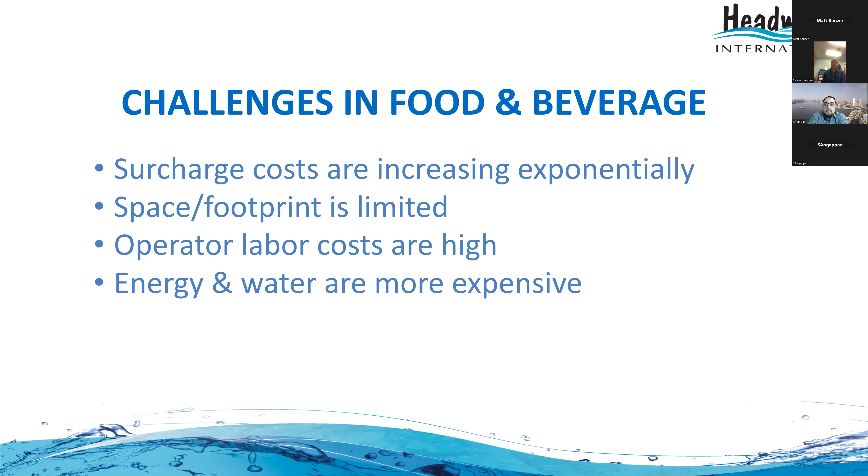Food and beverage industry is very diverse. There will be plants like a brewery, or it can be a soft drink, it can be meat. So the BOD, COD, all those things are highly variable. It can be as low as 1,000 milligrams per liter, or it can be more than 10,000, 20,000.

In a distillery, for example, the BOD can be up to 20,000, whereas in a small food packaging plant, it can be 1,000 milligrams per liter. Typically, for discharging to a local treatment plant, your limit will be 250 BOD and TSS, whereas discharging to surface water, it can be as low as 10 milligrams per liter.

And the FOG in the wastewater can be highly variable as well. In a meat plant, you will have high FOG, fat, oil, and grease, or it can be non-existent in a soft drink plant. Similarly, TKN ammonia can be very high, 300, 400 milligrams per liter in a meat plant, whereas in a soft drink plant, it will be non-existent.

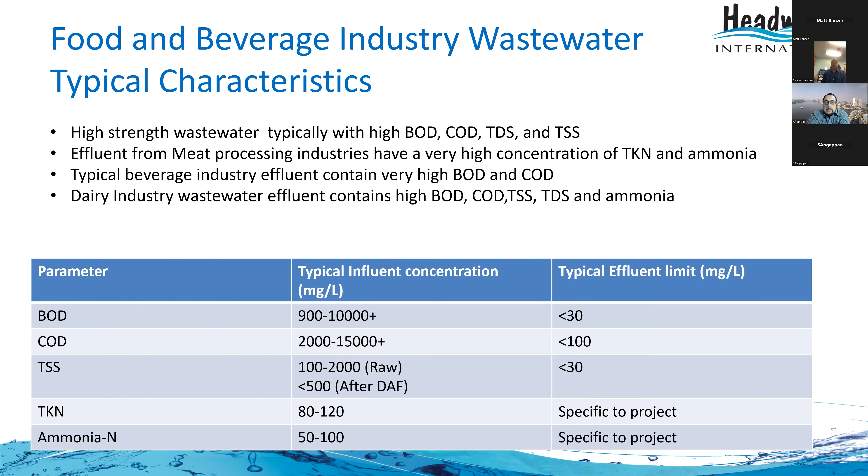So we can go through some case studies to show our installations in food and beverage industry. Surcharges are the number one challenge faced by the food and beverage industry. Typical limit to discharge to your municipal plant is 250 BOD and TSS, ammonia less than 45. These are typical municipal wastewater limits.

So municipal plants don't want to deal with any wastewater stronger than municipal wastewater, so they make you treat this wastewater up to this level. The surcharges are quite variable in the US. It can be as low as $1 for 1,000 gallons, or as high as $2 for 1,000 gallons. This is very diverse in different locations.

In California and Texas, water is scarce, so they charge a lot more, whereas in southeastern states, it can be low. Similarly, California BOD surcharges can be very high, whereas in the southern states, it can be very low. You can see the typical limits here - these are the middle range. There are many states under this dollar surcharge or over these surcharges; this is just the middle part of the surcharge limits.

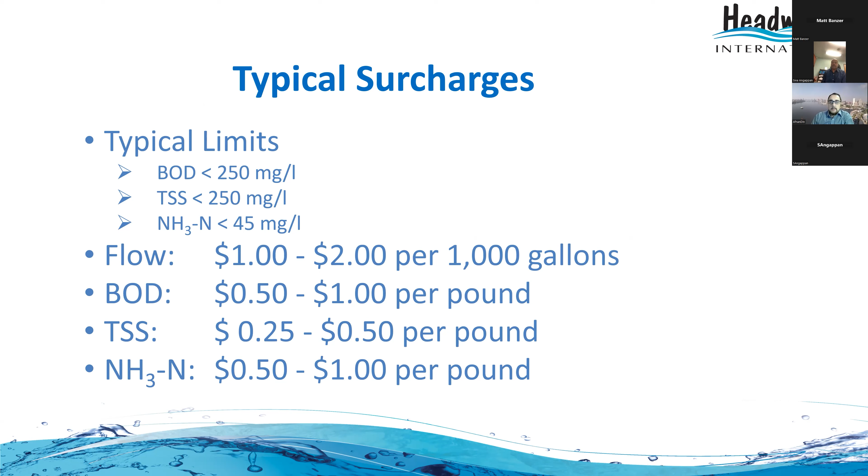So when you are looking at a typical mid-size food and beverage plant, we took a case study of 250,000 gallons per day discharge based on the lowest surcharges, with BOD at 1,000 pounds per day, which is about 450 kilograms per day, plus TSS and ammonia loads, to see how much surcharges would be charged. A typical plant this size would pay $1,000 per day, or $365,000 per year. As you can see, this is a very large amount.

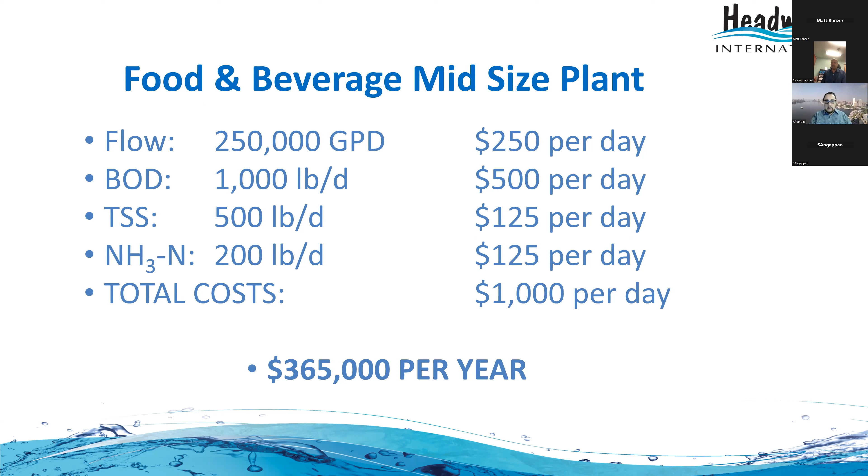We have installed some MBBR plants in food and beverage plants where the payback period from surcharge savings is as low as 1 to 2 years. That means if you spend $500,000, you can recover that through surcharge savings within a year and a half, so there's a short or immediate payback by installing a treatment system to avoid the surcharges.

So the operating cost is another challenge. Labor cost used to be $20-25 per hour just a few years ago; now it's almost $50 per hour for technical labor. The MBBR, as we propose, requires minimal operator attention, and I'll explain this in case studies later on. Meanwhile, energy costs have also increased by up to 50%.

So in those kinds of situations, you may want to consider anaerobic technology, anaerobic MBBR. Our version is called EnergyCell. Our anaerobic technology can not only save energy costs up to 80%, but it will also generate energy in terms of biogas that can be used for heating. So it can be net neutral or even positive in terms of energy consumption.

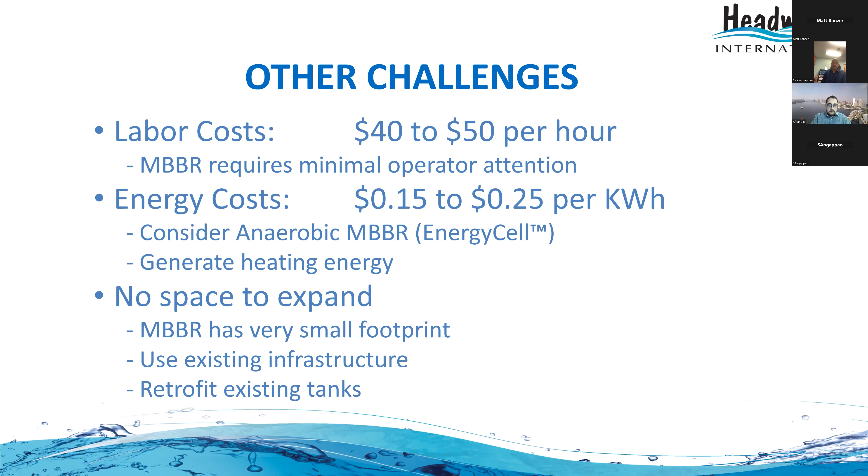And if we don't have any space to expand, we can offer multiple solutions. We can build a small MBBR plant in a small location, or we can expand using the existing infrastructure, such as tanks and other equipment on site. So with minimal space to expand, we can increase treatment capacity in terms of flow or to meet new requirements or increased loads.

So MBBR basics, I'm going to briefly touch on this. Typical biological treatment systems can be divided into two broad groups: suspended growth, such as activated sludge, or attached growth, such as fixed film systems. Within suspended growth, you have MBRs, SBRs, and other technologies. SBR is a batch technology, whereas conventional activated sludge is a continuous flow technology.

In attached growth, it can be a rotating biological contactor, or RBC, or a trickling filter. A trickling filter is a static fixed film, so the media itself does not move, whereas a dynamic fixed film, like an RBC, has media that is moving around. MBBR is a variation of the dynamic fixed film technology.

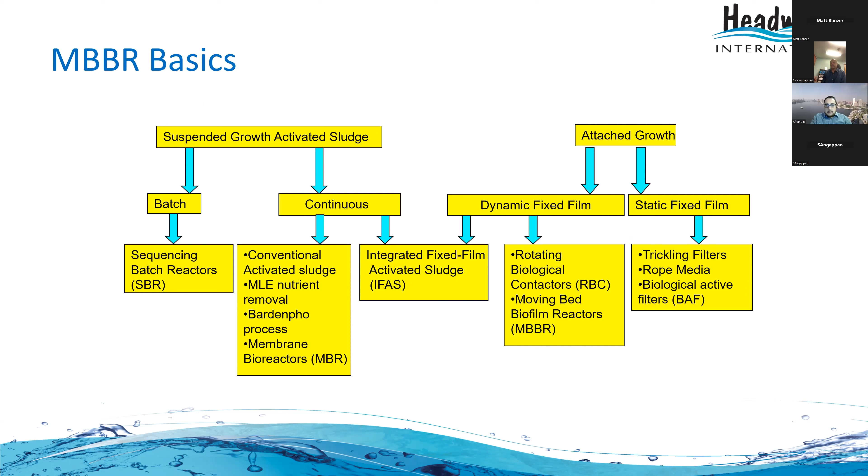In an RBC, the media is contained in a large drum, and the drum itself rotates, which is prone to failure in terms of bearings and other things. Whereas in an MBBR, small pieces of media float and are mixed in a tank, with no moving mechanical parts. So everything inside the MBBR is basically maintenance-free for over 30 years—there's no failure or anything like that in an MBBR process.

There's a newer version of MBBR technology called IFAS. The only difference in IFAS compared to MBBR is that we recycle the sludge. This is advantageous when you have an existing activated sludge system and want to expand capacity in terms of flow and loading—we can use IFAS technology to do that. By recycling the sludge, you bring in the activated sludge, and you also have media in the tanks, making it a combination of fixed film and suspended growth technologies.

The footprint of this technology is even smaller than MBBR because you have two different processes running within the same tank. The only difference is that in MBBR, we tend to use DAFs, which have a small footprint, while IFAS technology will try to use the existing clarifiers.

So why would you choose one versus the other? You'll choose MBBR if you have a greenfield site and don't want any kind of operator attention within the biological reactor—many of our MBBR plants don't have a dedicated operator; production plant personnel check things once a shift and go back to production. That's a big advantage with high labor costs, especially for small wastewater plants. With IFAS technology, you'll probably need a dedicated operator monitoring MLSS and RAS. It's suitable for larger plants or for retrofitting an existing plant.

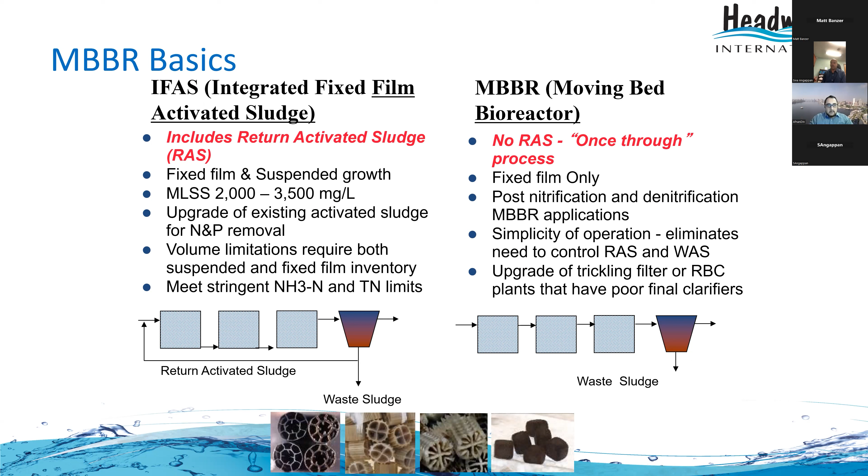We can use IFAS technology for biological phosphorus removal and total nitrogen removal, whereas MBBR is generally used for BOD-only removal processes. If we have a large meat plant, for example, we can use the IFAS plant to remove total nitrogen as well as phosphorus. So biological nutrient removal can be done with the IFAS process, a combination of fixed film and suspended growth processes. MBBR is more generally used for industrial pre-treatment, to meet pre-treatment standards to discharge to a municipal plant. It can also be used to retrofit or replace lagoons, trickling filters, RBCs, those kind of things. There are some case studies we'll talk about later on.

So the advantages of MBBR, I want to summarize. It's a single pass technology, meaning there is no recycle or MLSS to maintain. Water goes in, water comes out. The biomass is retained on the media.

It has a compact footprint, only 1/4 of the space required for activated sludge. So if you have an activated sludge plant already, we can actually expand the capacity 3 to 4 times in flow or loading using the existing tanks. We don't have to build a new tank. That's a big advantage if you have a plant you want to expand and have no new space - we can retrofit the MBBR process into that plant.

The second point is that HRT, hydraulic retention time, is not a limitation for MBBR technology. The reason is our design is based on surface area loading rate, the amount of media in the tank, not based on retention time. So you can have a very small tank with a lot of media, and that flow can handle as much as 4 times what activated sludge can handle.

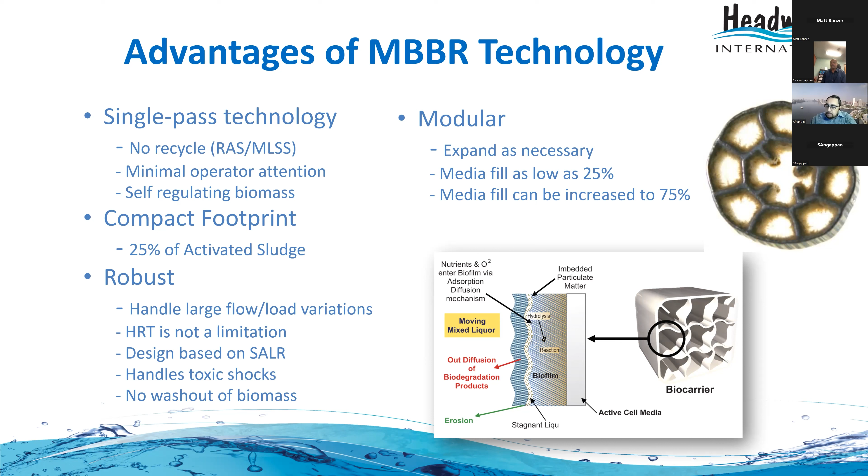That concludes the part of the MBBR basics. The next part will be the anaerobic MBBR. Dr. Somnath Basu will take over here.

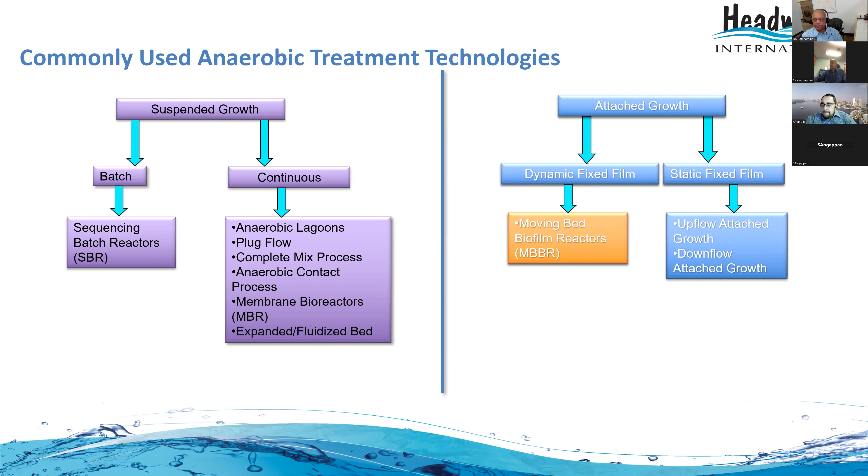Hello, good morning, everyone. I'll be very brief. So in anaerobic treatment, there are again two types of commonly used treatment processes, and accordingly there are different types of reactors, and anaerobic MBBR falls under the category of moving bed biofilm reactors. Here the movement is conducted by mechanical mixing, because the reactions take place under anaerobic conditions without aeration. This slide shows the biochemical reaction steps - there are 4 basic steps: hydrolysis, acidogenesis, acetogenesis, and methanogenesis, conducted in series by different types of anaerobic microorganisms.

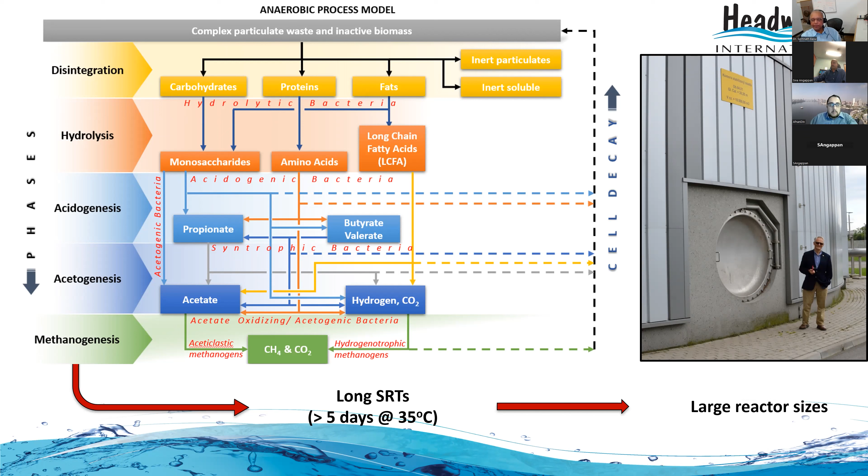So the process was developed first in the laboratory of University of Manitoba, and then it was scaled up to a pilot scale, and then at a brewery in Manitoba. So now the process is well established, and the first commercial installation has been in 2023.

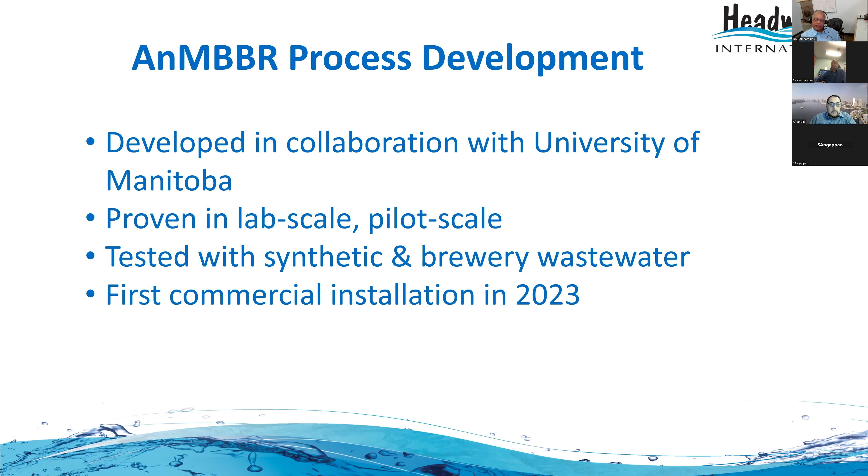Headworks also has a patent on this technology, and I'll go through some basics. Basically, the mature biofilm was developed within 2 months, as opposed to a longer startup process with suspended growth anaerobic processes, and 80 to 90% COD removal was achieved. Then the OLR, organic loading rate, we achieved about 23 kgs per cubic meter per day and 37 liters per day of biogas production.

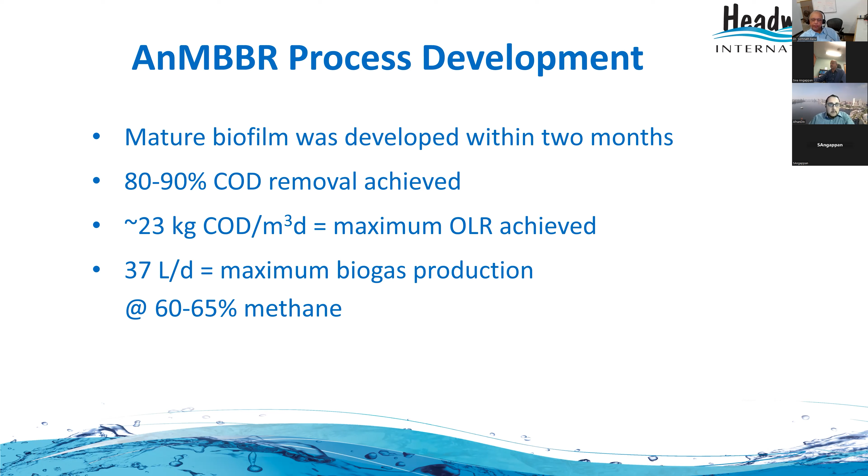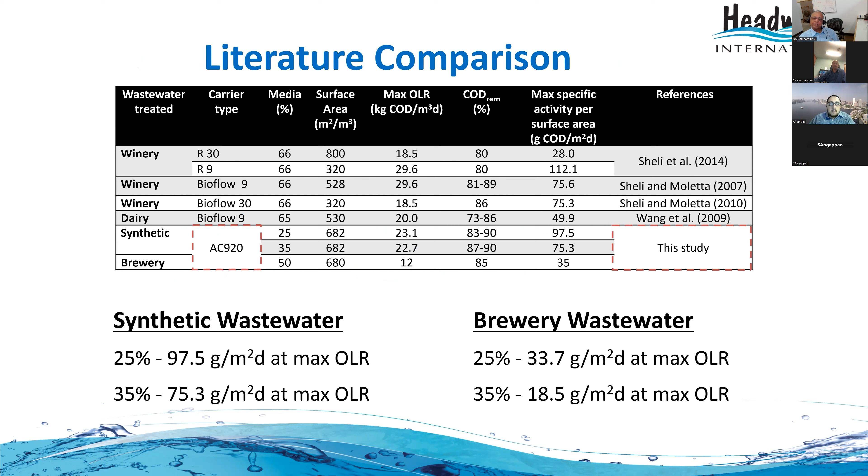I think I will skip this slide. This has some comparison of our pilot scale data versus whatever has been reported in the literature, and they are very comparable. In certain cases, they exceed what has been reported in the literature.

So in essence, what is an anaerobic MBBR? It is an anaerobic process combined with MBBR technology, so basically it derives the benefits of both biofilm processes, fixed film processes, and anaerobic processes, and it is applicable for high strength liquid waste, typically greater than 3,000 milligrams per liter. Then the biomass grows on the media support as biofilm, and because there is no aeration,

mixing is provided by mechanical mixers. The pH has to be monitored, because if there is not sufficient alkalinity, it consumes alkalinity. Anaerobic reactions consume alkalinity, so there may be a trend to reduce the pH, and that has to be monitored, and if necessary, pH has to be added, alkalinity has to be added to maintain the pH in the optimum range. And nutrients, for the most part, may not be needed for food and beverage waste, because it comes

with the wastewater. It is derived from the actual food, but if needed, there may be addition of phosphorus and nitrogen as needed. And then these reactions take place under anaerobic mesophilic condition, 30 to 35 C, and it may need downstream polishing. It depends upon the regulatory requirements of the downstream processes.

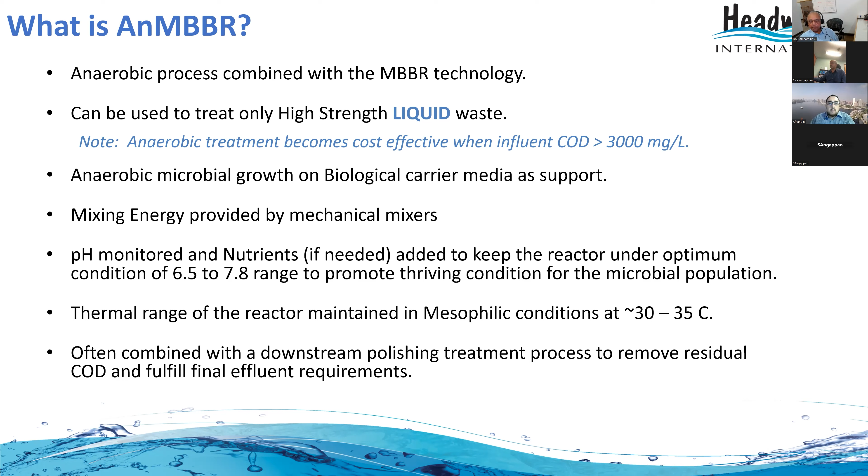So basically, as I said, it combines the advantages of both anaerobic processes and MBBR technology. The advantage of anaerobic process is elimination of aeration energy, which is about 50% of operating cost in a treatment system. And then, because the sludge growth is very low, order of magnitude less than aerobic processes, the sludge storage and hauling cost is minimized, which is about 20 to 30% of the operating cost of any treatment system.

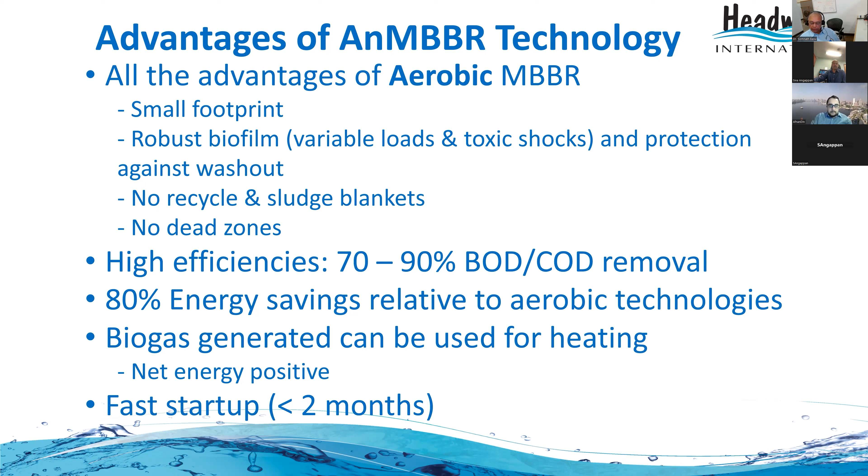And then biogas production as a fuel, which can be utilized for boiler or other purposes. And the benefits of the attached growth processes: low SRT, low reactor volume, low feed footprint, and hence less capital cost. And then because it is fixed film, it is protected from washout under shock loads and shock flows. So that is the summary.

And then this is a typical MBBR reactor. You can see the gas and then the treatment system, the treatment reactor with mechanical mixers, and then the dosing systems.

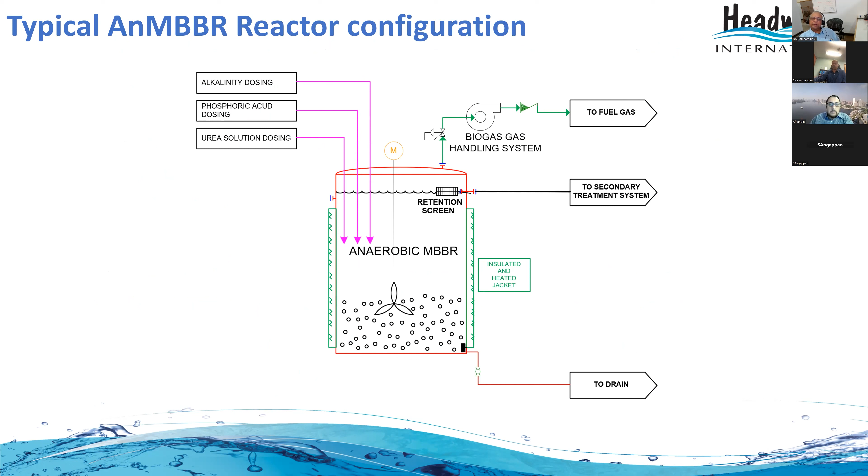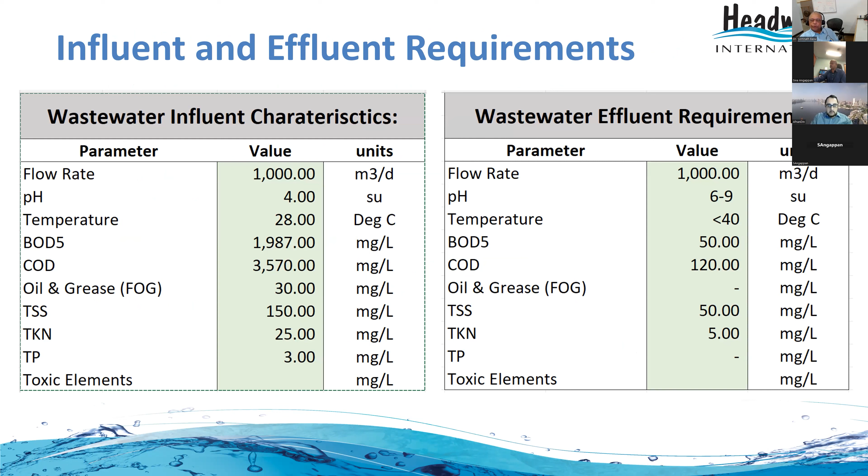Okay, then we move on to the case study, and it is a case study for the first plant that we supplied to do a project, a beverage project in Mexico. I'm not going to go through all the details of the design, but the effluent residual COD is 536, and residual BOD is 179. This is because about 80 to 90% of the COD is reduced and the remaining part has to be aerobically treated.

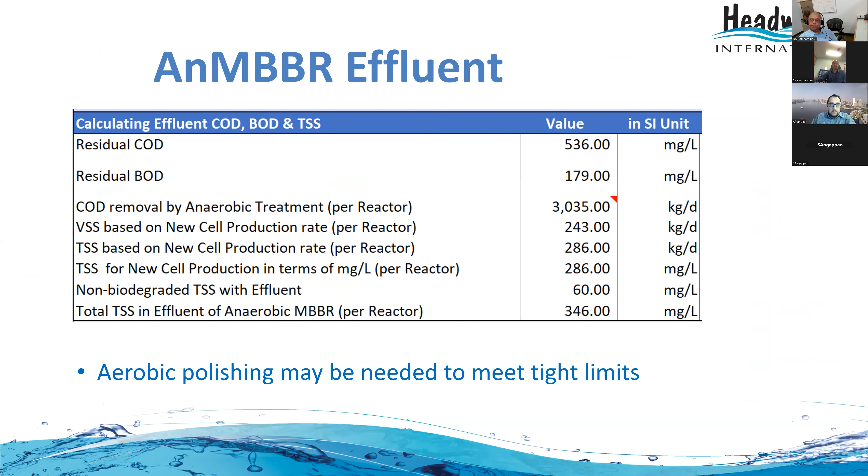Okay, then we move on to some of the case studies, and I pass it on to Mr. Din, who is the Vice President of our Middle East region. Mr. Din, please. Thank you, Dr. Som. So the first few case studies actually will be spoken about by Siva, and then I'll cover the case studies in my region. So Siva, just go ahead. Thank you, Afnan. So the first four case studies are in North America, so I will be talking about that.

So Hershey's Creamery is an ice cream plant in Harrisburg, Pennsylvania. They had a situation where they were building a greenfield ice cream plant. But they said initial 1 or 2 years, they'll be running the plant at only 1 shift per day.

Later on, they will build out to 3 shifts per day, depending on demand and production capacities. So for that, they needed a flexible treatment system that can be expanded in a modular way. We proposed a 2-tank system with low media fill.

We will design the overall system for the future capacity at 15 GPM at very high loads. But initially, we will design for 10 GPM at low loads and build it over time.

So the BOD and COD are very high. They had a preference to aerobic MBBR technology because they didn't want any kind of operator attention to the plant on a sustained regular basis. They wanted somebody to go check the wastewater plant once per day. So due to these constraints, and also since it's a greenfield site, we proposed aerobic MBBR

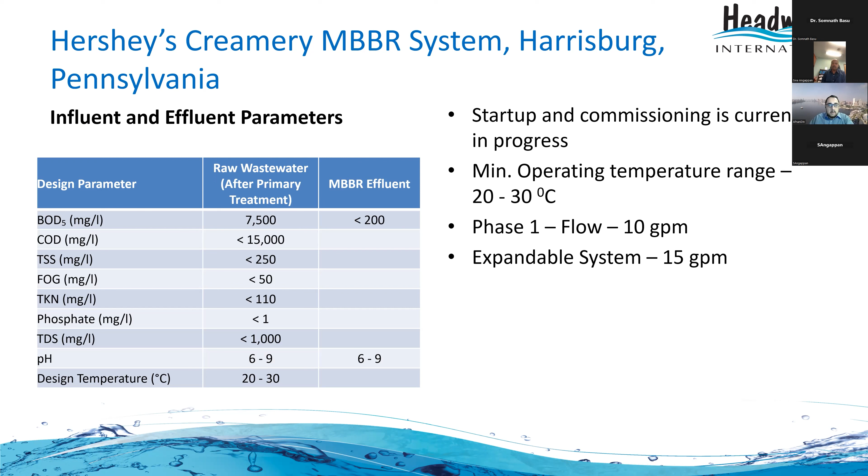This plant has already started up. It's running right now only 1 shift per day. When they are ready to expand, they will add more media without building any new tanks, so it will be a modular system.

This is a poultry plant in North Carolina for House of Raeford. They had an existing activated sludge system, but around 2018, their chicken demand doubled over the year. But they did not have space to build a new activated sludge system, so they came to us for some ideas.

So we proposed what's called a roughing reactor, which is placed up front, shown in that picture. The plant itself is very high flow, 1.5 MGD, and they didn't have to convert it to add a new activated sludge system. They would have required a 200 by 200 feet large plot to add the activated sludge system.

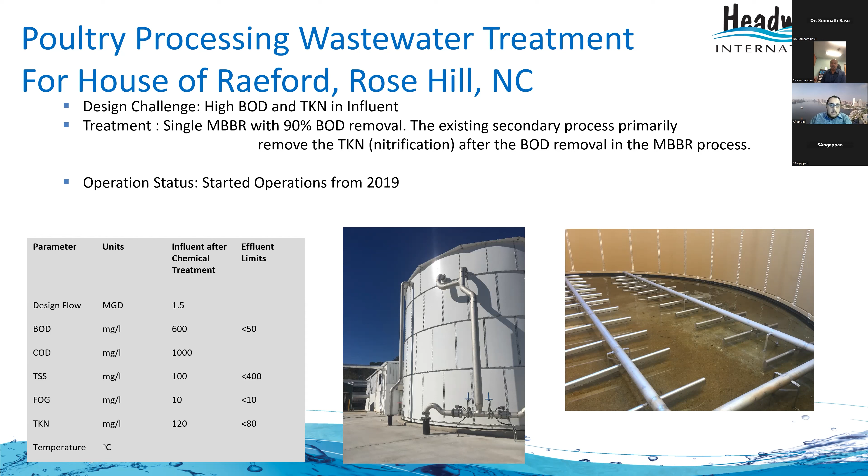What we proposed was a roughing reactor in front of the activated sludge system, shown in the picture there. That's about 40 feet diameter. Within that 40 feet diameter, we are able to remove about 90% of the BOD. So the activated sludge system following the roughing reactor MBBR can handle the remaining BOD as well as nitrogen removal, ammonia removal.

This is a potato chip plant for Frito-Lay in Peru. They also make corn chips here. They had an existing trickling filter which was failing, but they did not have any space to put in a new system to replace it, because they wanted to use the trickling filter area for other production storage.

So we put in a very compact 8 feet by 30 feet long MBBR plant, shown in the picture - basically on a walkway in the plant area. That's all the space they had available. We put in this very compact MBBR plant handling 400,000 gallons per day of flow and removing 70% of the BOD, from 1,000 down to around 300 milligrams per liter.

This is again a roughing reactor. The effluent from this plant is discharged to activated sludge and then discharged to the city plant.

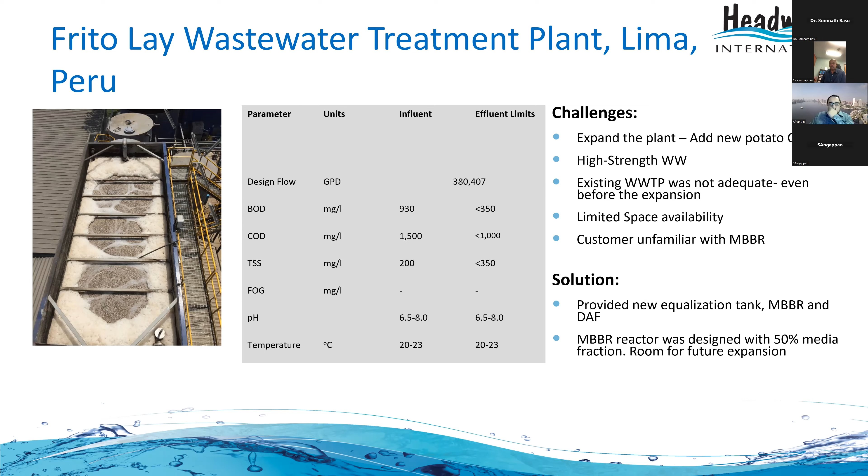This is a fishery packaging plant. They take fish from another plant, cut it into pieces and process it to make frozen fish products in Danvers, Massachusetts. They had an existing trickling filter plant, which was very smelly and a nuisance for the neighbors, so they needed a new technology to replace the trickling filters.

So we put in a complete turnkey type system. We provided the DAFs - pre-DAF and post-DAF - as well as a 2-stage MBBR reactor to replace the trickling filter. It handles 70,000 gallons per day, BOD of 1,500 milligrams per liter, and is discharged to the sewer without paying any surcharges.

By doing the MBBR technology, they have avoided surcharges as well as handled municipal complaints about smell, noise, and other issues. Those are the 4 case studies in North America.

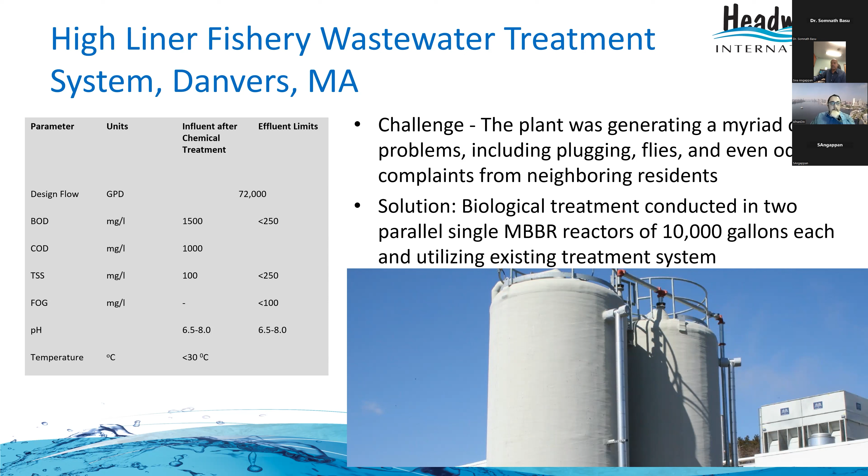Afnan will talk about the next case slides. Excellent, thank you Siva. So I'll be going through some case studies from different wastewater in the food and beverage industry. The first one is the Tanmiah Poultry Plant, a poultry plant in Saudi Arabia where we supplied a complete turnkey solution.

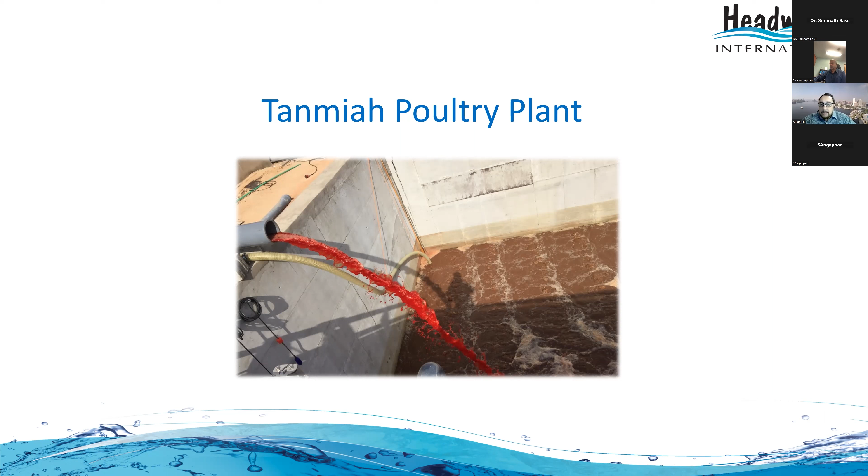It was an existing activated sludge plant where the flows and loads had increased because they had increased the slaughtering of chickens, so they had more load to treat. We offered a retrofit solution of the existing activated sludge plant where we increased capacity and improved effluent quality so they could reuse it for irrigation purposes.

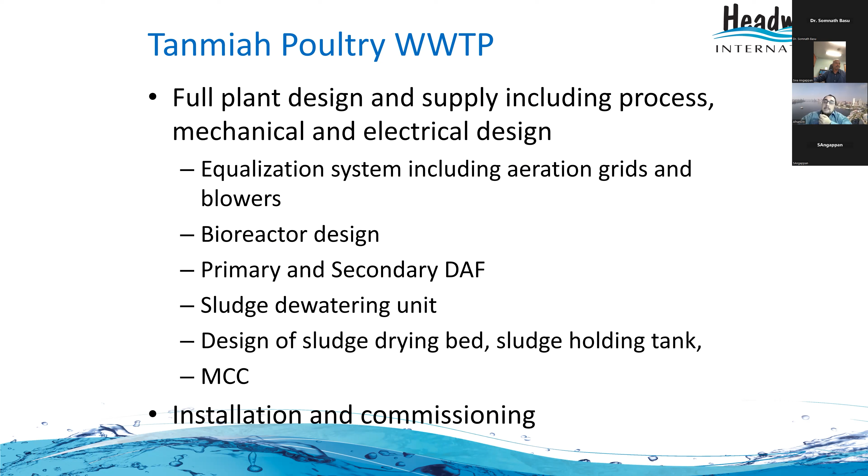Our scope in terms of what we supplied: we did the complete plant design, and supplied all the electrical and mechanical equipment. This includes equalization tanks, aeration grids, blowers, the design of the activated sludge plant coupled with the retrofit MBBR solution, both primary and secondary DAFs, as well as sludge dewatering. We did the installation and commissioning. The only thing Headworks did not do here was the civil works - apart from that, we provided everything.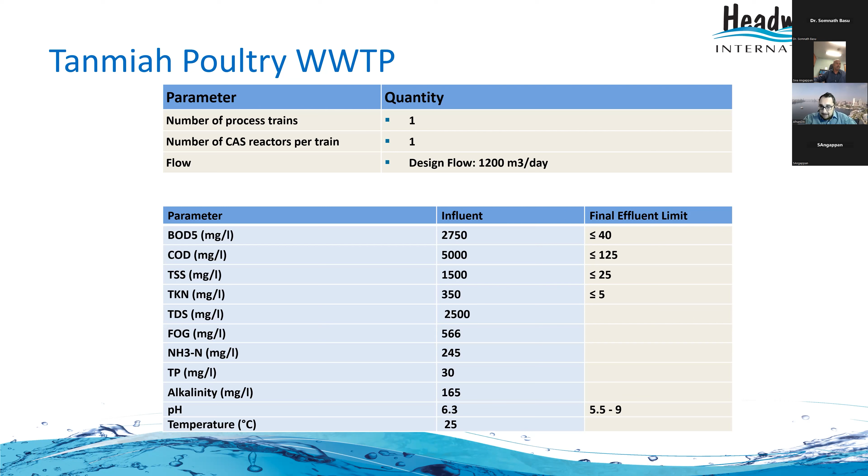The system was designed for 1,200 cubic meters per day. Typically in poultry effluent treatment you have high TKN - you can see here we had very high TKN, 350 milligrams per liter, and we had to achieve an effluent of less than 5 milligrams per liter. COD is high, around 5,000, but it's highly biodegradable waste. BOD was around 2,750, and we had to achieve less than 40 BOD in the outlet and less than 125 milligrams per liter COD in the outlet.

Here you see the proposed scheme and the scheme that we followed. After the influent, there was a pre-treatment screenings system we supplied, followed by equalization. After equalization, we have primary treatment through a primary DAF, where we dose polymers to primarily remove solids and associated BOD. Then we had an existing activated sludge tank which we retrofitted with an MBBR roughing reactor to handle the additional loads coming in, and we kept the existing activated sludge plant as an activated sludge reactor using the existing surface aerators.

So the MBBR reactor was retrofitted as part of that CAS reactor. You need some pH correction upstream of the biological step, followed by a secondary DAF to remove solids generated from the biological step. The sludge was then treated - both primary sludge from the DAF and secondary sludge from the secondary DAF - in a belt filter press, and the final effluent was used for irrigation.

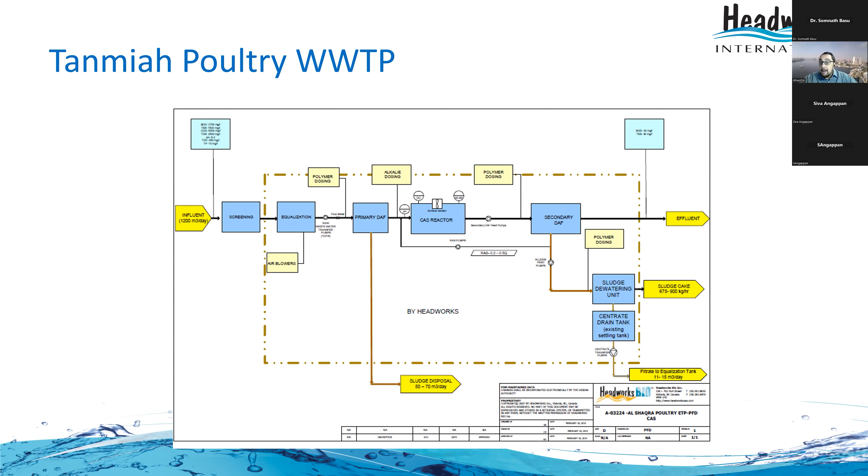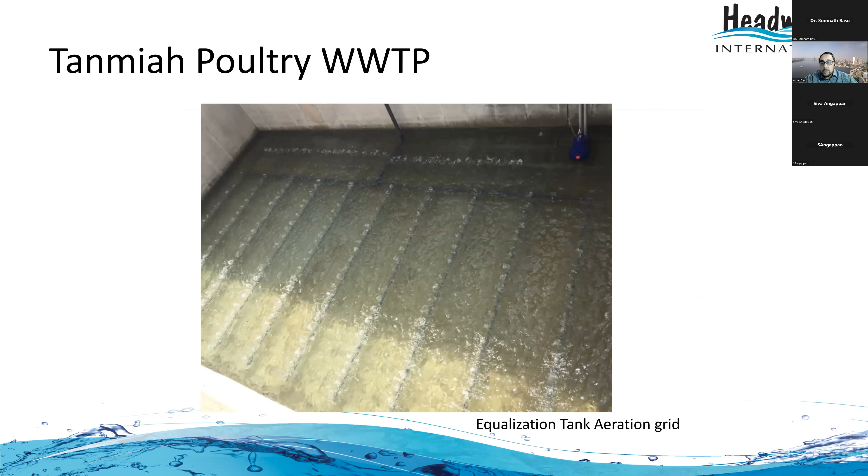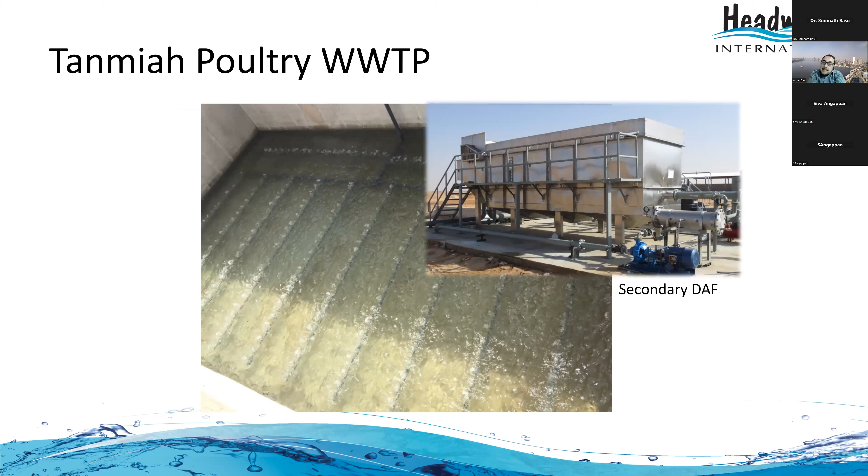So here are some photos, you can sort of see the installation. This is an equalization tank with aeration grids to ensure homogenized influent to the process. The DAFs are provided in stainless steel - we use rectangular DAFs, they take up less space, and primarily that was the reason. This is the existing activated sludge basin with surface aerators, so we use the existing tank.

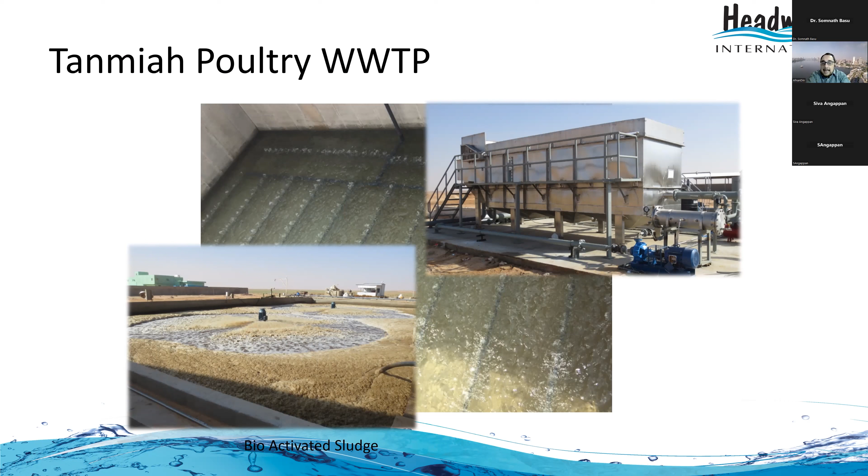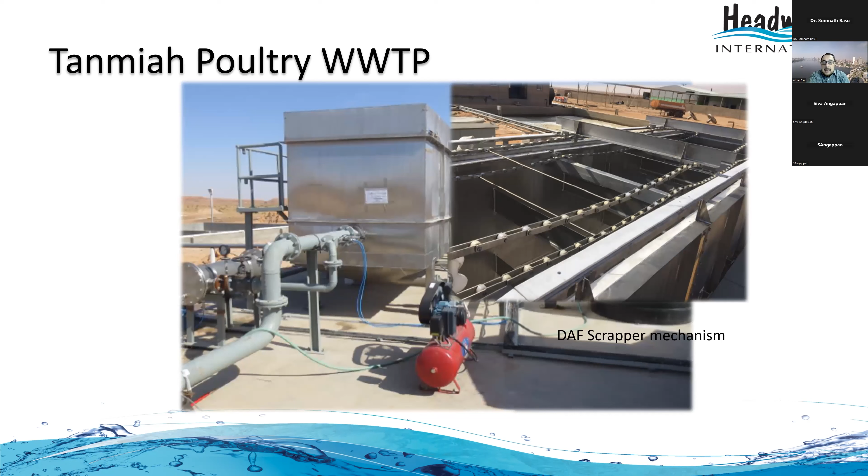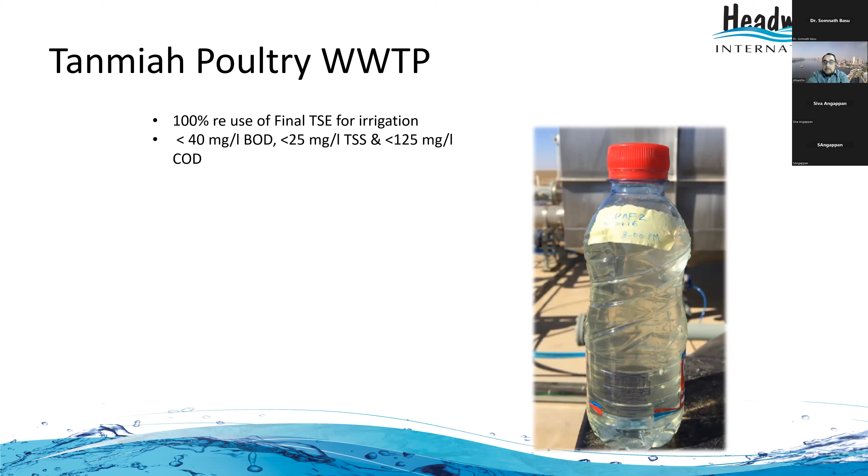There was minimal civil works here actually, because the DAFs were provided prefabricated, delivered to site - all you needed was a concrete slab, so they were skid mounted DAFs. Just some more photos of the DAFs alongside the chemical dosing system, the scraper mechanism on the DAF, and in operation. This plant's been running now for about 8 years, and we were able to 100% reuse the final TSE, the effluent for irrigation. So we achieved the limits, and the plant is now producing effluent which no longer needs to be tankered or discharged.

This case study is a milk factory in Africa, where we provided an MBBR solution, an IFAS solution. It's a hybrid solution - an IFAS solution which combines attached growth on the media along with activated sludge.

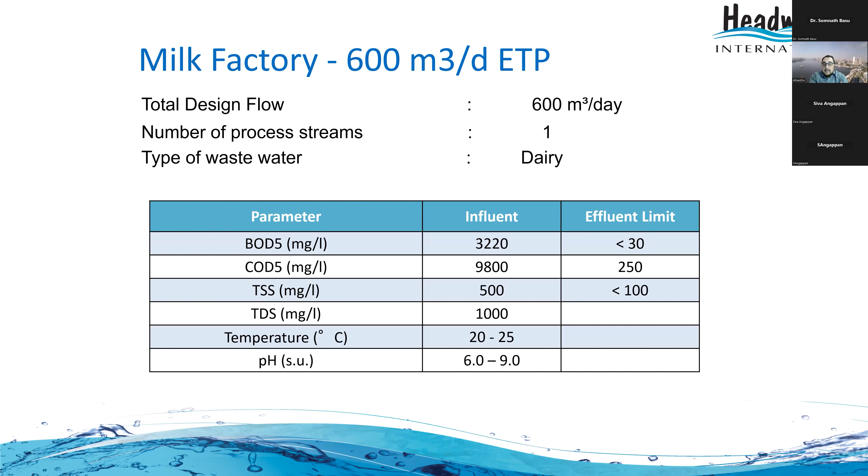One of the big challenges here was the high COD - you have very high COD, and the COD to BOD ratio is more than 3:1. We were able to treat the effluent with a very compact, small footprint solution down to less than 30 milligrams per liter BOD and less than 100 TSS. The advantage of this proposed solution was that space was limited at the milk factory - they had very limited space.

So they were looking for a solution which was very compact, as well as able to work under low flow conditions, because initially when the factory was being set up, they were not anticipating enough flow and load coming into the works for the first couple of years. So an IFAS system provides that flexibility where you could run the plant at slightly lower flows, as well as when it ramps up to full flow.

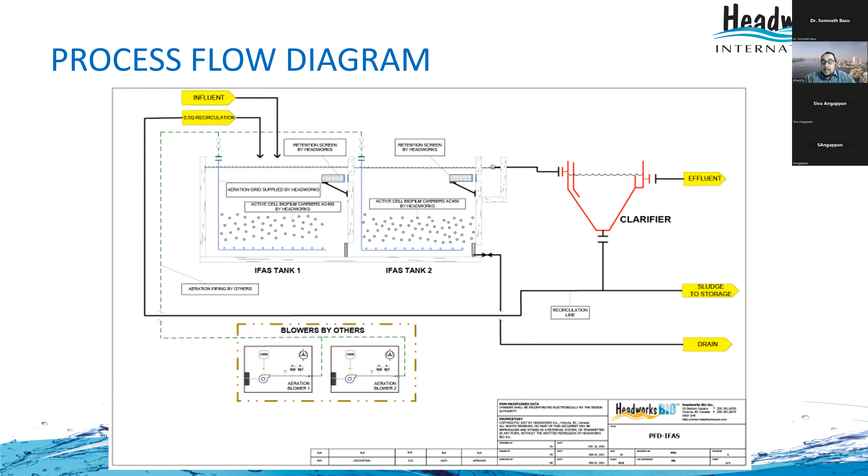This is a two-stage reactor process where you have two IFAS tanks in series. The first IFAS tank does the bulk BOD removal, and the second does BOD polishing. The solids are then settled in a secondary clarifier, and the RAS is returned to maintain a mixed liquor concentration in an IFAS tank. Here you see the two tanks in series - glass lined steel tanks, these are the two IFAS tanks.

The carriers we use to grow biofilm - we have a range of carriers, all with different surface area, ranging from around 400 meters squared per cubic meter to approximately 800 meters squared per cubic meter. Depending on the loads, the capacity, what we're trying to achieve in terms of removal, we will select the ideal media to use, the ideal surface area. Having such a range allows us to customize our solutions for different types of wastewater.

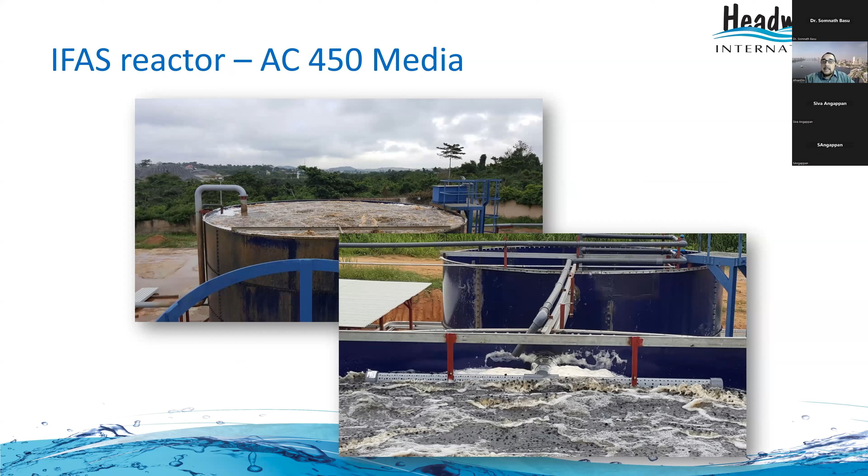As you can see with these two examples, it's very strong wastewater in terms of load, very high COD, very high BOD, but COD to BOD ratios are very different. The poultry project had very high TKN, whereas this project for dairy had very high COD coming in. This is a project with Unilever in South Africa - an ice cream factory.

This had similar challenges to the earlier one, where footprint was a big driver. They were looking for a solution which was very compact and took up less space. The proposed solution we implemented was primary DAF, followed by a two-stage MBBR, followed by a secondary DAF. The COD was reasonably high at 8,200 milligrams per litre, the BOD as high as 4,100, and the design flow was 220 cubic meters per day. We're able to achieve a BOD of less than 10 milligrams per litre in the outlet, COD less than 50, and TSS less than 5.

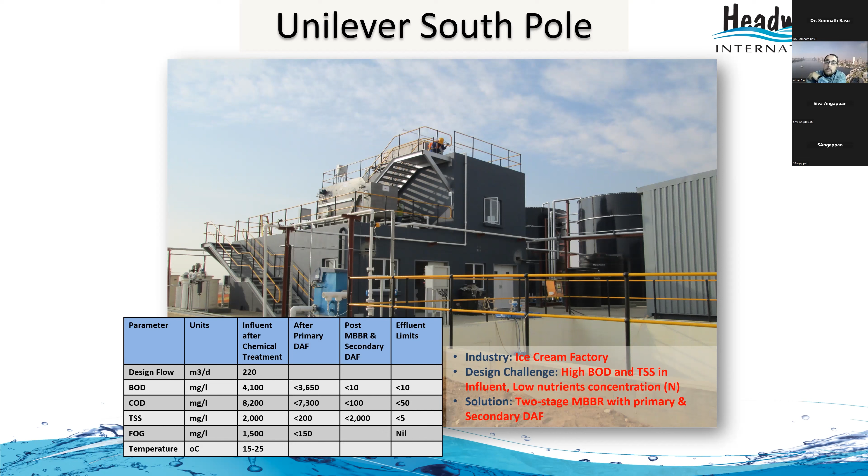The final effluent here passes through UF and RO. So it goes through MBBR, secondary DAF, UF and RO, and then is fully 100% recycled.

Here you see a very compact DAF - it's all pre-assembled, prefabricated when delivered to site, so it's plug and play. You see the MBBR tanks on the top left, and on the right you see the carriers - this carrier is ActiveCell 920. 920 is the total surface area, but the biofilm grows on the internal surface area, which we refer to as protected surface area. So the surface area of AC 920 is 680 meters squared per cubic meter.

What you see here is how the biofilm attaches to the carrier. This, in essence, is the reason why you have very small footprint solutions when using MBBR or IFAS, because we use a process where carriers grow biofilm, and the carriers provide large surface area for biofilm to grow in a very small footprint.

One thing to notice here is that the biofilm thickness is self-regulated. It's controlled through the aeration and mixing in the tank and the collisions between the carriers, and that controls the biofilm growth. This maintains a certain biofilm thickness, prevents the media from ever clogging, and it self-regulates based on the influent loads. So if the loads vary, which sometimes happens in different industries depending on what's happening upstream in the production cycle, the MBBR process self-regulates - it's very robust in handling those variations in loads.

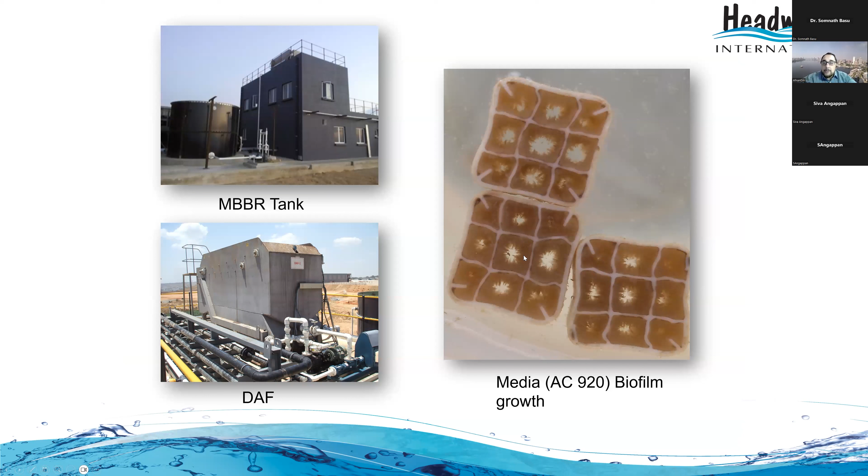This is a project in Egypt with Arma Foods. It was an edible oil plant. Again, nearly all these references I've shared so far have very high COD - very high COD, high BOD, and we're consistently achieving less than 10 BOD, less than 50 solids, less than 150 milligrams per litre COD. So this was edible oil in Egypt.

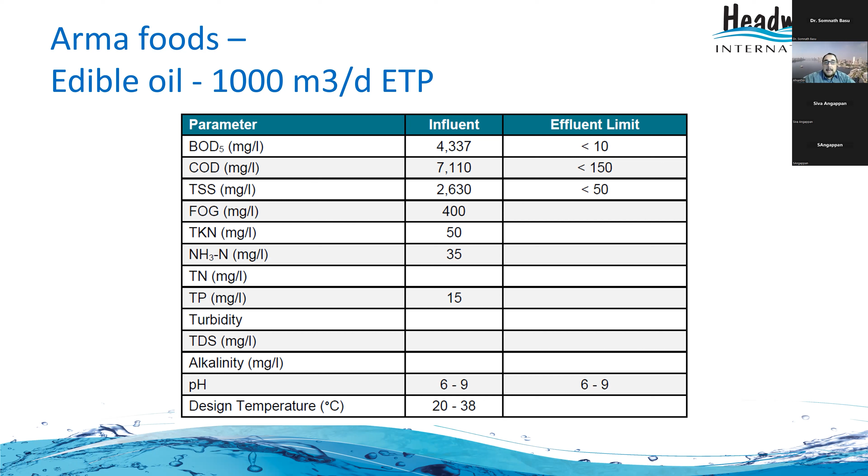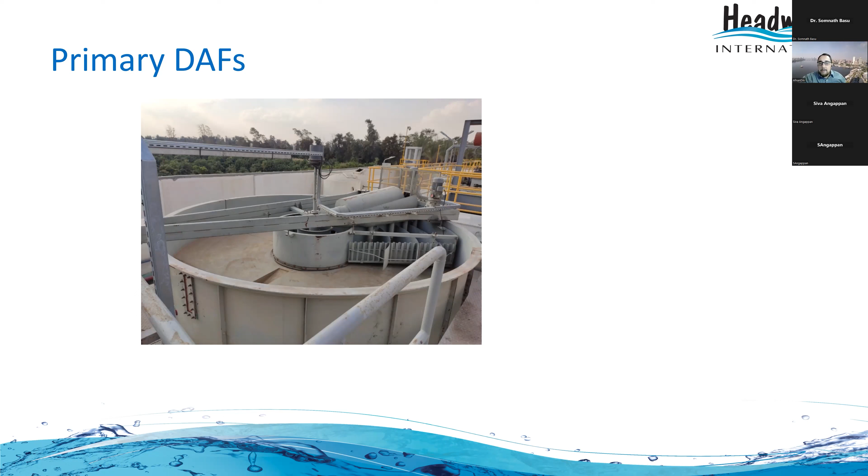The proposed solution here was again circular primary DAFs, followed by a two-stage IFAS process, followed by a secondary clarifier. So we had a primary DAF to remove the fats, oil, and grease in the influent, and then we went with a two-stage IFAS followed by a secondary clarifier.

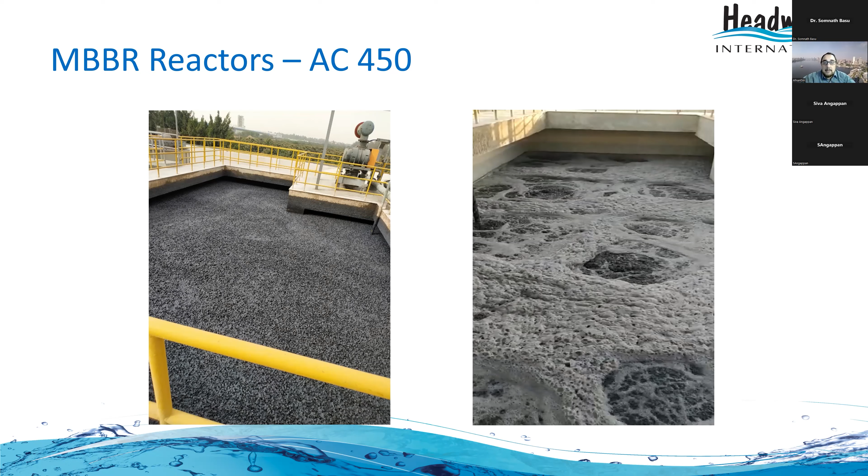So just to summarize and conclude our webinar for today, Headworks has over 25 years of experience in MBBR IFAS technology. We're one of the leaders in the market when it comes to biofilm processes. Our first commercial installation was in the last century, in 1999, so a long time ago now.

And we have over 100 MBBR industrial installations around the world treating difficult to treat wastewater. Not just food and beverage, but we've done oil and gas, refinery wastewater, petrochem, pulp and paper, mining, and lots of different types of wastewater.

We provide customized solutions. We're really process experts. We can analyze wastewater characteristics and provide the solution that's the best fit. We're very flexible in terms of what we supply. We can do turnkey solutions, we can do core technology. We like to provide process guarantees, we carry the process risk. We're not just a component supplier, but really knowledgeable in terms of doing process design.

We do a lot of turnkey solutions for our industrial customers. We can also get involved at very early stages of a project, in terms of when permitting needs to be applied for, planning permission needs to be applied for, when concepts are being developed. So it's not that we get involved at a very late stage on a project, but we can get involved and work with end users and industrial customers when projects are being conceptualized.

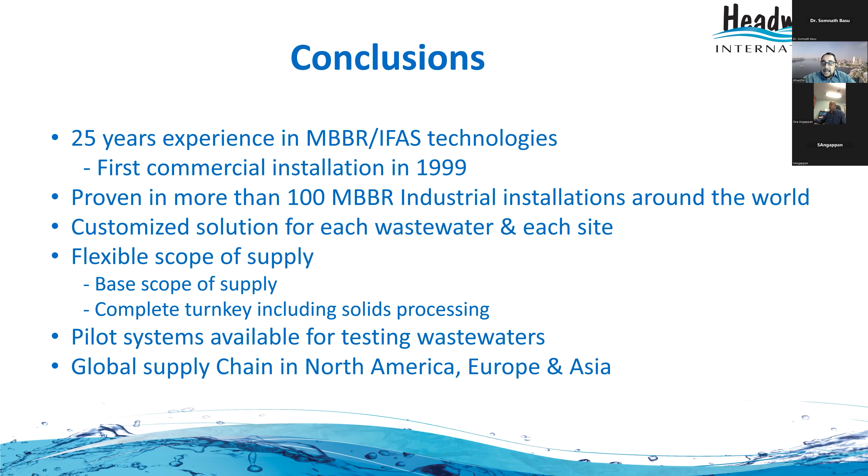We've got a really good question from Bill. Thank you, Bill. Bill has asked, how many full-scale anaerobic MBBR installations do you currently have, and do you have an anaerobic MBBR pilot unit available? Do you want to take that, Siva?

Yeah, so we do have an installation in Mexico for FEMSA Coca-Cola, and we can develop a pilot scale system. That will be highly customized for each plant, so we will have to build a pilot for anaerobic MBBR technology for each site. So we do have pilots, we just have to customize that for it to be an anaerobic MBBR pilot. So it certainly can be done, Bill, and maybe after this call Siva will get in touch with Bill to discuss that further.